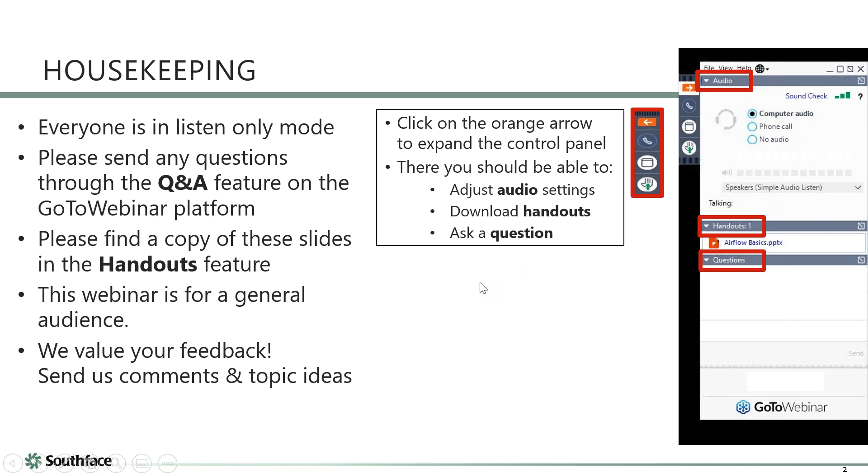So without further ado, you've heard him giggling in the background, we've got Mike Barcik here. Mike, introduce yourself. Hi everybody, thanks for joining us, and shout out to Ali and Joey, thanks for helping put this all together. These have been a lot of fun for us, and I think this one is going to be kind of neat because it's a chance to talk about larger issues of designing high performance homes. It could go in a lot of different directions, you could spend a day or two on any one aspect, but we're just going to say from a higher level, what would you do? So I think that's going to be fun. Joey, anything you want to add? Yeah, and you'll hear us.

I'm seeing quite a few new folks on this webinar. If you haven't been around, we've done about 12 of these, and this one in particular kind of encompasses all of the previous ones, or most of them anyway. So frequently you'll hear us refer to previous webinars, and if you missed them, that's okay, because we have them available for free on our LMS system, and I believe some are posted on YouTube as well. We also did one last on load calculations, that'll get posted along with this one fairly soon.

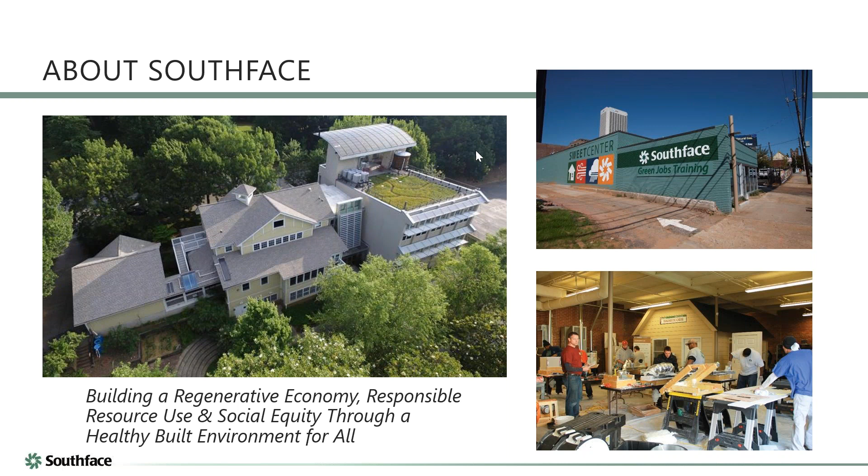And we have a question. We always like to gauge who's here. I think after 10 of these we have a pretty good idea, but if you're not one of the things, we'll go back to that slide in a minute. If you're not represented by any of those answers, you can chat me a message. We kind of wanted to get a good idea, it's almost completely evenly split. I can't see the poll, so you'll have to tell me. I'm gonna give everyone a minute or two. What's the poll question, because I can't even see it?

Oh sorry, how many of these webinars have you attended? So what are the choices? I think we should give a special prize if anybody has attended 10 out of 12. Almost a quarter say they've been here for 10 plus. We'll check our rolls, we'll afford as many trophies, medals, or whatever, gift cards to the growler store or whatever. Sorry about that, I better watch what I'm promising here. But no, that's great. We really do appreciate your feedback and your attendance.

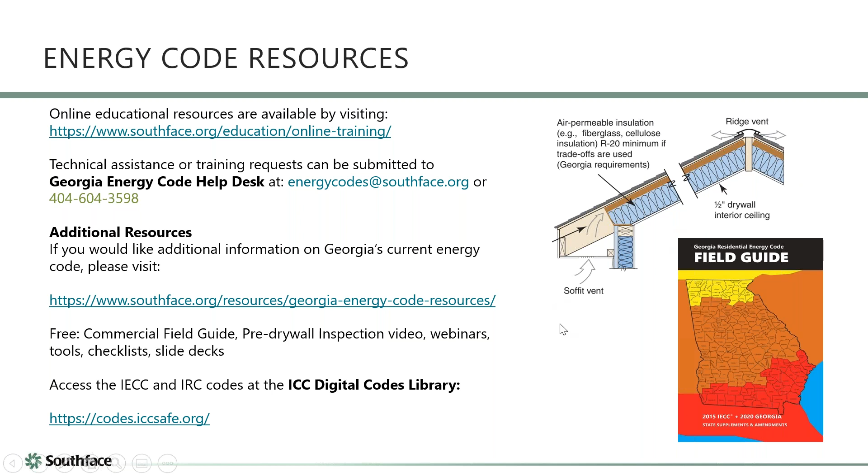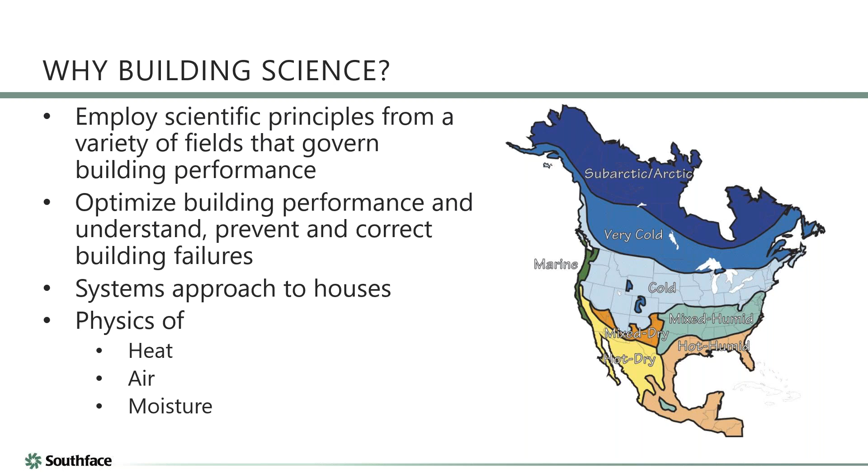We always want to make a pitch that there's a lot of good information on our website, but specifically we recently came out with these field guides helping explain the energy codes with pictures. Obviously a high performance home is going to meet or exceed the energy code, so that goes without saying. I think we've made a pitch for this in most of our trainings about why this stuff is so important and how to apply it to real world situations. Again, it's about the flow of heat, air, and moisture, and houses are systems made up of components, and integrating good design into all this ultimately leads to a high performance place for people to live in.

I think people have probably in the last 6 months had a renewed interest in what it's like to be in their home a lot and what impact that has on them. I do think coming out of this it'll be interesting to see what changes home design. I think you're definitely going to see more focus on use of space, like a home office or homeschooling, probably enhanced pantry or food storage, or toilet paper storage.

I think that's all in the works, but it is an interesting sort of thing that we're learning about how to make our home good.

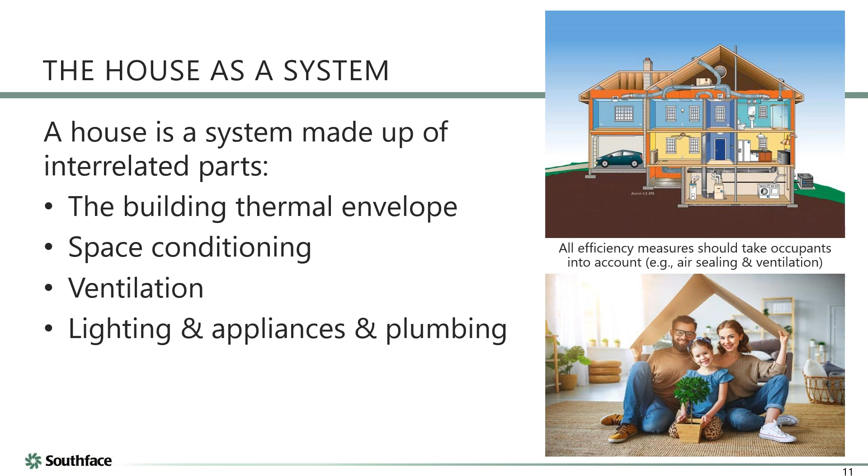So here's what we really want to cover today. My goal is to get mainly through the first bullet and probably get through at least the first 3 bullets. And if we have time, we'll talk about the HERS industry some at the end. I sort of padded some content there.

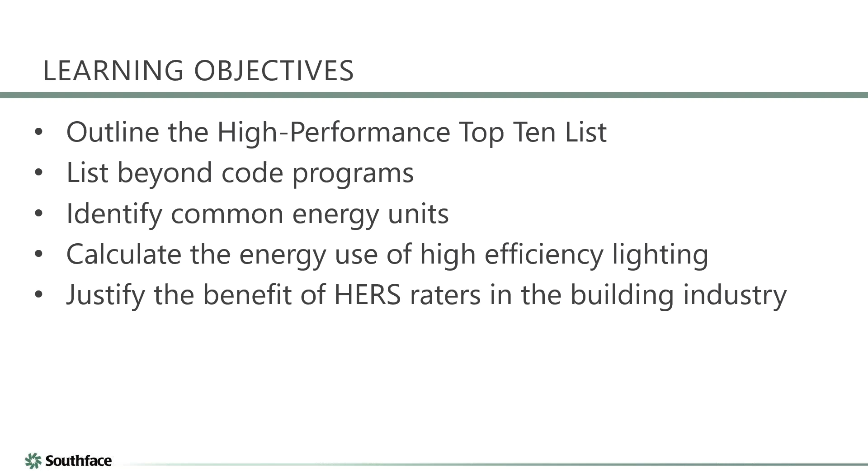I really want to just have a conversation with you, Joey, and see if people have comments or questions. So when I high level approach this, people ask me, I want to design a high performance home, what should I do? And I say, okay, well first of all, we're going to have an understanding of the concepts, the physics, and we're going to let that be our guide.

So heat, air, moisture - we're going to specifically focus on doing a really good shell or enclosure, and that's going to be structurally sound. It's going to be well insulated and airtight. It's going to be durable from a moisture standpoint, and hopefully also constructed out of materials that are environmentally positive in their attributes, or at least try to minimize the negatives.

We don't want to put something in that either is going to make us sick or poison a bunch of people in its manufacture or whatever else. So just trying to go a little deeper is part of our nudge on that topic.

I decided to go ahead and spell out air distribution because I felt like even homes with different mechanical systems, there's always going to be, at the very least, a ventilation system that is ducted. And understanding, usually in this country, we're still building a lot of ducted mechanical systems, and how do we do those right? We've certainly spent some time on these.

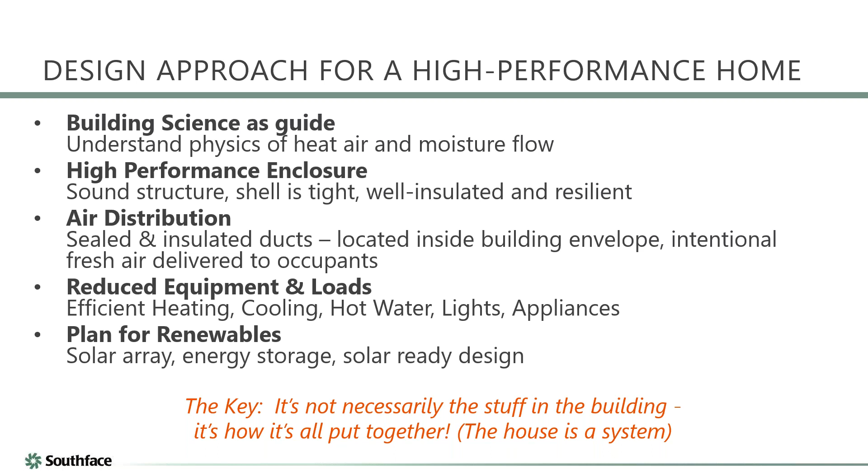I would say try not to get too obsessed with a given technology. It's really not about an individual technology. It's about thinking in a systems mindset and putting things together in a well thought out, integrated manner. So, all right, Joey, I'm off my soapbox.

So I had to do this a couple of years ago with my colleague Burke at the time, and we were presenting to a group of architects, and I thought, well, I must have watched David Letterman or something - let's make a top 10 list of things that you should pay attention to. And so this is what we came up with, and I'm sure there's other things, but ultimately it's a starting point.

So some are more obvious than others, and like you said, Joey, I bet we've done a webinar on just about every one of these, right? Mm-hmm. Maybe not the last couple or so, but most of these. What have we not done it on? I don't know.

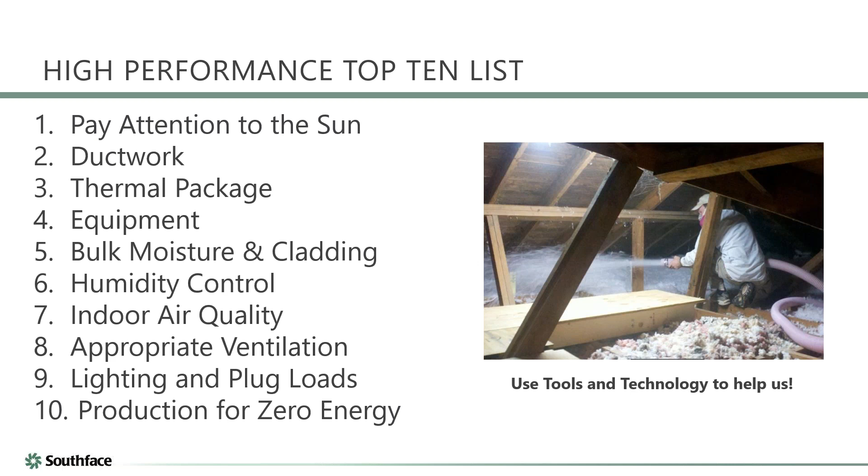So, I'm also going to say there's both design and then there's technology, and we want to use them both intelligently. We don't want to rely on technology to offset a poor design. And likewise, let's take advantage of what technology can offer us to make a good design. So, all right, Joey, number one, pay attention to the sun. What's the rule here?

You generally want glazing on the north and the south and minimize it on the east and the west. That really allows you to take advantage of these overhangs.

This is actually our building at Southface, built in 1996. Even though it's 25 years ago, the sun hasn't changed a whole lot, so we were able to take advantage of long-lasting design decisions. You can actually see the first picture, the one with the shading.

That was taken just a few weeks ago, at the summer solstice on the 21st, at high noon, so the sun is at its peak. You can see our overhangs, which aren't very wide — they don't stick out, they don't look silly, they're just normal overhangs. They're blocking quite a bit of the sun.

And then at the winter solstice, the sun is low and we're actually gaining all that solar energy we need to heat up the building in the winter, which is especially important in winter climates. They really have to capture that sun. We do it more as a convenience, and it takes a little bit off of our heating loads for sure.

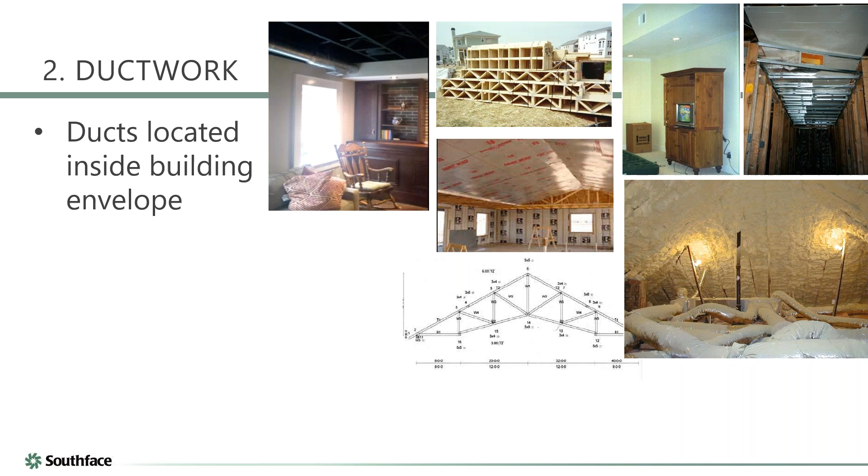It was a lot of fun. We were definitely on our soapbox for quite a bit of that time, but one of the main things we talked about was trying to get the ducts located inside the building envelope.

So these are various techniques to do that. None of them are particularly complicated. A couple are a little expensive, but all of them are done reasonably easily. I'm a big fan of one, just exposed ductwork like we see in the left picture. I think especially now that aesthetic is in, especially in more commercial buildings, but even in some residential.

And then all the way to the far right, using fur down ceilings. That's actually something we used when I first got started in green building. I was in a low income housing program similar to Habitat for Humanity, and we built really high performance homes with fur downs. We used 9-foot studs on the first floor and just put the ducts in that little fur down space. It was definitely very inexpensive and easy to do, and it helped us keep those ducts inside the conditioned space.

That's a great story, and it really helps reinforce how you use design, and the net result is you use a lot less ductwork. You design your registers to throw from the wall out to the middle of the room, and especially now that we have better windows and better insulated and air sealed walls, we don't have to put a register right in front of a window. That's anachronistic, that's just old, that's because windows used to be terrible, but we don't have to do that anymore.

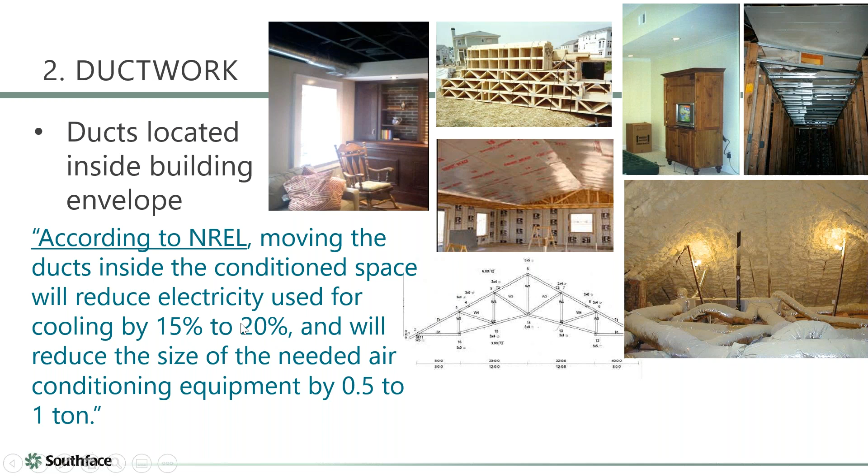So great choices. Of course, with a crawl space or basement foundation, just insulate the walls and condition that space, and now your ducts are inside is a big player. It's a 15 to 20% impact to not put your ducts in the attic, and it allows downsizing your equipment. So big benefits to that.

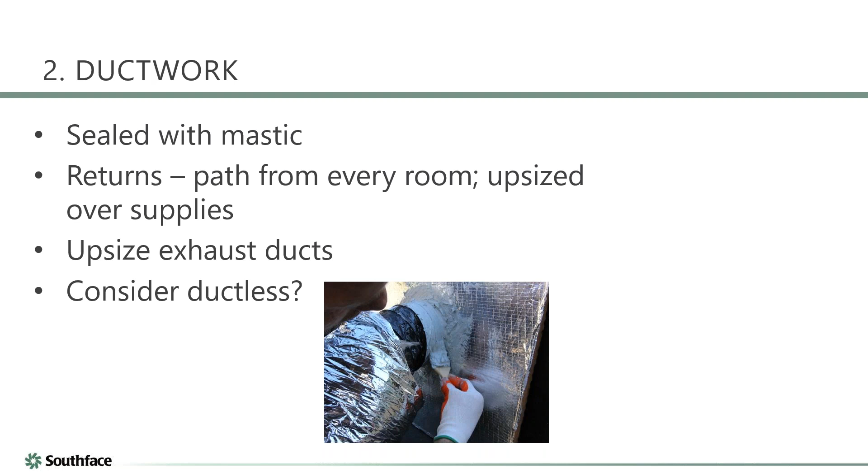Also, other issues with ductwork include sealing ducts carefully with mastic, whether inside or outside. We want the air to get to the rooms. And in terms of returns, we want to make sure there's always a pathway for air to get from the room back to the blower, whether that's a dedicated return, some other return pathway, or a jumper duct.

In terms of returns, I want to go on record saying we have a chronic problem with undersizing returns. You can never have enough, or too many, return pathways. You can never have a return duct pathway that's too big. A larger return pathway makes airflow much easier and allows for potentially better filtration too. So, let's be real, a lot of these problems go away if you look at ductless, and we'll talk more about mini splits in a little bit.

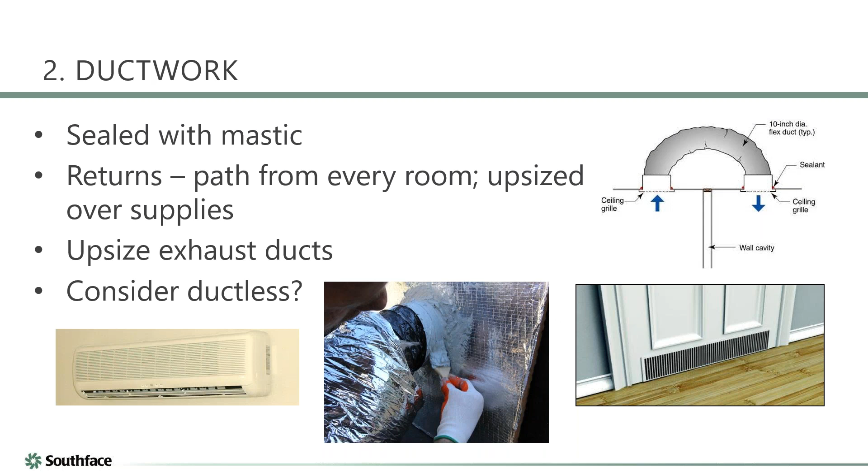From an insulation standpoint, if you look at the prescriptive code today, the newest code out is the 2018 IECC, and if you don't change what that says, it's actually pretty good. I mean your exterior wall - again it depends on your climate zone - but I think you should shoot for at least an R20, and really what we should shoot for is an R20 with a thermal break, so it's even more than that. We'll talk about that in a second.

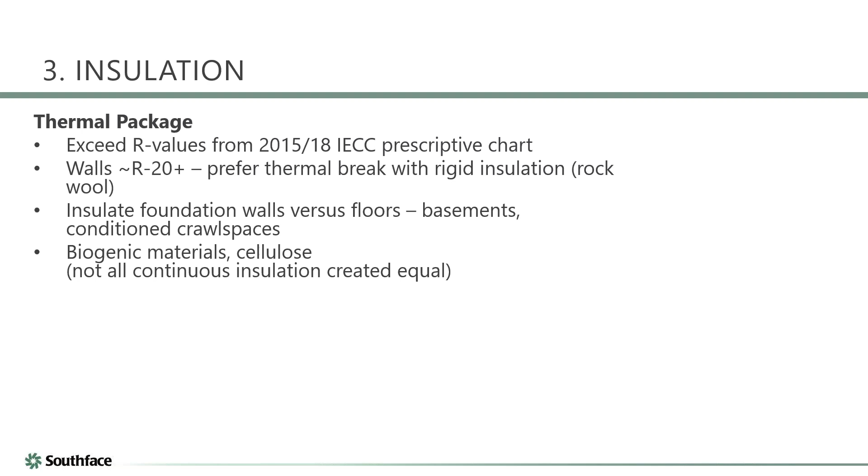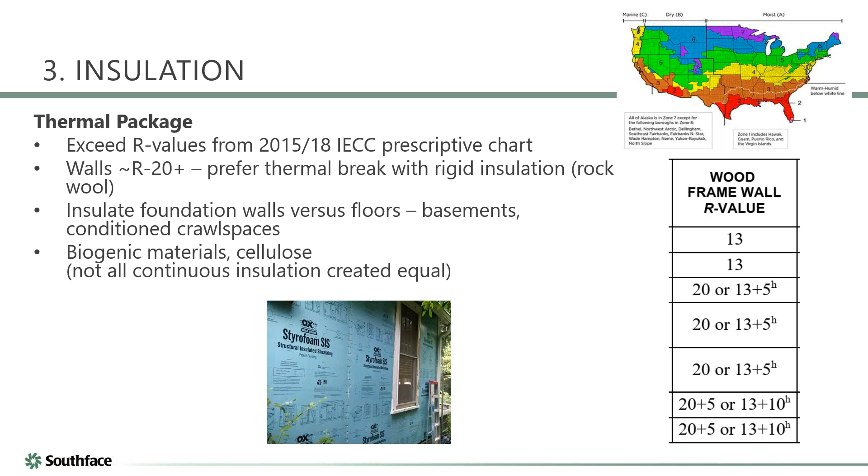And then, like we said, you definitely want to insulate foundation walls with some continuous insulation. There are ways of insulating foundation walls that allow you to, even if you don't finish out that space like a basement, still insulate the walls. Now all your ductwork and mechanicals are inside.

This idea of using materials that can actually sequester carbon is something I think we're going to see more and more of. I'm no expert in that either, but certainly a lot of the new technologies are working on that, which could help in the long term.

I'd say you're being kind of hard on folks. R20 plus a continuous thermal break is a lot. I'd be happy if we just did 13 plus 5. Looking at this chart here, you'll notice the energy code favors this. I'm no engineer, but I'm okay at math - 13 plus 5 is less than 20. So what they're saying is that if you do 13 between the studs and then 5 continuous insulation, such as this styrofoam in the middle, that's about as good as an R20. Actually, it performs a little better - we've done the math in one of those previous webinars.

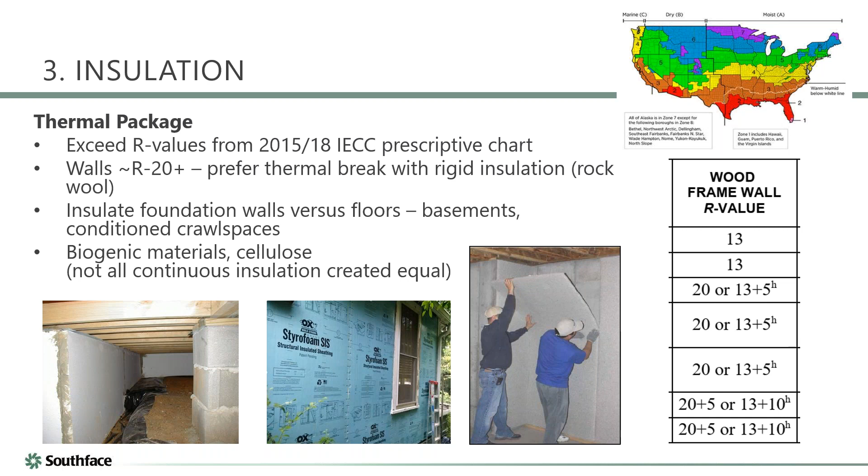Certain types of foam board, sadly the blue and pink actual styrofoams, have more of an environmental impact than polyiso foam or even EPS foams. There are other continuous insulation products too, like rigid rock wool products. You've got to do a little digging on some of this stuff, probably more than we can cover today.

In terms of the actual framing, we're certainly big advocates of trying to put wood where it's going to work for you structurally. You've found this graphic - it shows standard framing versus advanced framing, where you're probably 24 on centers using ladder tees and things like that. There are all kinds of details you can use to essentially not have a building that's any less strong, but that has a lot less conduction pathways through the framing.

This was a house that I think did a nice job, where they framed with a 2x6 plate and 2x4 studs. The inner studs are 24-inch on center, and the outer studs are 24-inch on center, but they're staggered by 12 inches. That allows you to spray insulation inside, and effectively the only thermal bridging happens at the bottom plate and top plates. That's a really cool way of doing it. You'll also notice you can frame in such a way to get insulation back in the corner.

I believe this builder also oversheathed, which is a way you can do things in a number of ways. You can wrap the whole building with wood sheathing, then come back on top of that with continuous insulation sheathing, staggering the seams. There are a lot of variations on that, but that's probably the most common one. So that's a good wall assembly.

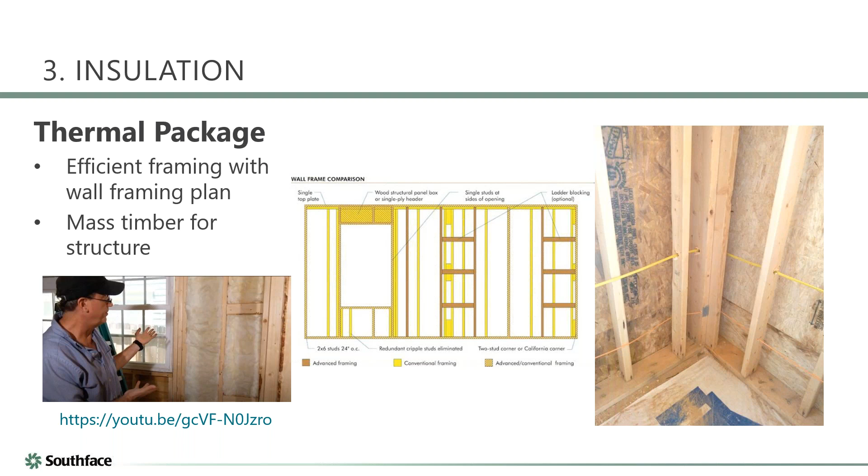There's also products like the Zip system - I think it's called Zip R. It's insulated sheathing - an OSB sheathing with an insulated board pre-attached to it, and a weather barrier on the other side.

So I like that product. In terms of mechanical systems, what are we looking at trying to do?

Here's an interesting one: if you're going to use gas in this day and age, you want to make sure you're using the most efficient equipment out there. For gas space heating, you're looking at a 95% AFUE furnace or better. They do have them up in the 98%, which means literally, you buy 10 units of fuel, you're getting 9.8 units of heat into the space. So it's a condensing technology. It's been around forever. It's a no-brainer. It's very safe. It's obviously very efficient. It's the best way to go.

And for cooling, the big feature you want is variable speed. Variable speed has different meanings, but at a very minimum, you want the blower, the air handler blower, to be variable speed. But more and more, we really want to see a staged compressor as well, or variable speed compressor. The technology helping make this happen is either an ECM motor or an actual inverter-driven compressor motor. I'm not an expert on this technology, but the outcome is that your equipment can modulate itself to match the load on the house.

This is very important because historically we size equipment for the hottest day of the year, and most of the time it's not that hot. So this allows, anytime your equipment can run on low speed, it uses just a fraction of the energy it would on high speed. So very important.

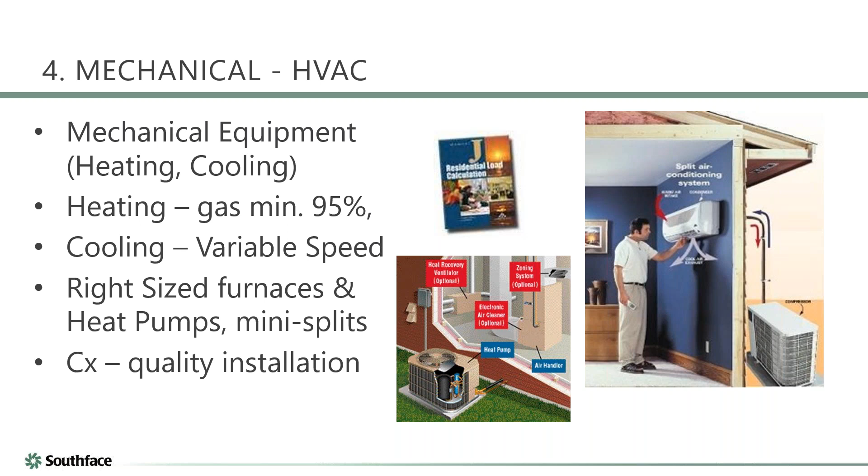So for hot water, maybe in the future, Joey, we'll do an entire webinar on this topic. But this is one where we now have these really great choices for both gas and electric. So if you're going to go with gas, we want something that's very safe, and that means we need to up the efficiency. Tankless is very popular today as well. For new construction, I think you can justify gas tankless. Let me be clear, not electric tankless, gas tankless.

For homes that are all electric, an electric heat pump water heater is an incredible no-brainer. It is significantly more efficient than electric resistance tank, to the point where it's probably right on par with the cost of hot water with gas, maybe only slightly more. So it's definitely almost 2.5, 3 times the efficiency of an electric resistance tank. Heat pump water heaters, really good idea.

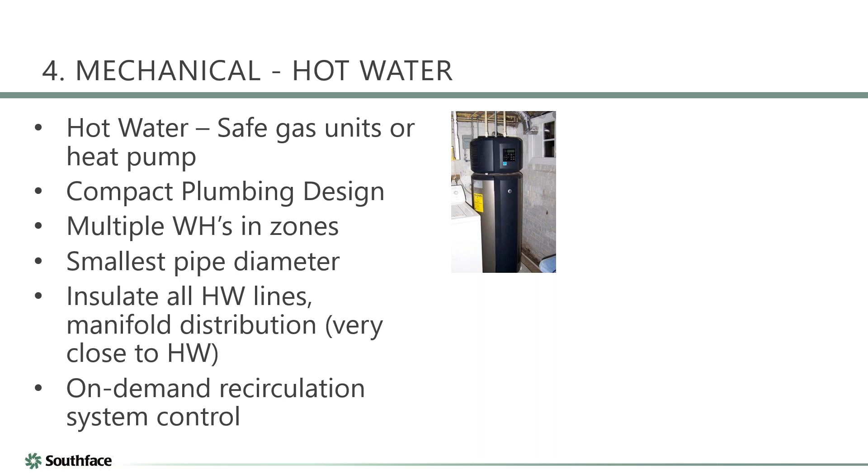There's a lot to be said about where you put them. They can be noisy, and they need a certain amount of space. But a great place, where's a good place for a heat pump water heater? The basement. A basement is an excellent place for one, because one of the things you get is free dehumidification of the air around it. So keeping a basement dry, like this picture, is a good idea.

Pipe insulation, pretty much a no-brainer, very low cost, very good benefit to that. Insulate any bit of hot water piping.

Compact plumbing design: try to cluster your hot water using fixtures relatively close to each other, and run your plumbing lines as small a diameter pipe as you can. You really want to minimize the volume of water between the thing that makes it and the thing that uses it. So the answer is short, straight lines, small diameter, and cluster the plumbing together.

Also, in bigger houses there's nothing wrong with using more than one water heater. Here's my thing though, don't put two water heaters side by side down in the basement of a big house. Put one on the east wing and one on the west wing, that kind of thing. Use good judgment on this, and appreciate that plumbers are not tuned into this. They understand leaks, but they don't understand distribution issues.

It's all about really trying to minimize the volume of water, and that's why we have things like manifold systems. And Joey, tell us about recirculating systems.

Recirculating systems, basically, if you have a water heater that's far away from the fixture you use, and it takes a long time for that water to get hot at the tap, a recirculating system will flush that cold, or lukewarm, formerly hot water that turns cold after a certain time, throughout the system, so you have basically instant hot water. This can really cut down on water usage, because typically you run that hot water for a minute or two before it actually warms up, so that can be gallons of water wasted every time you turn on the hot water, which is unfortunate.

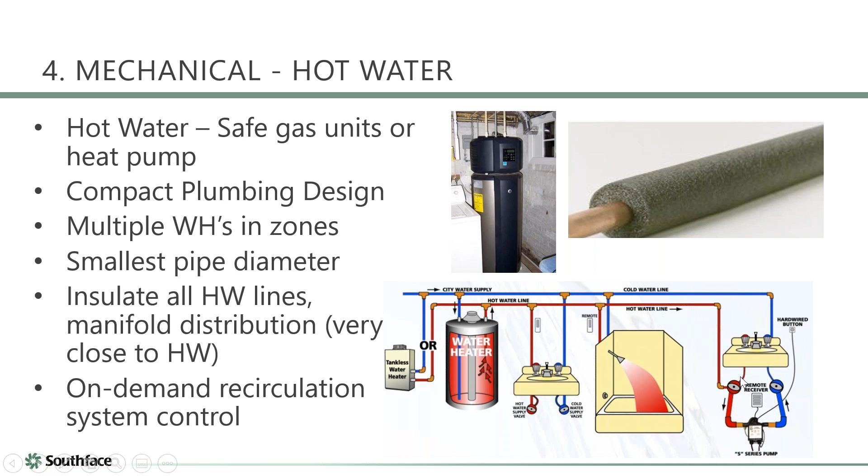In terms of moisture issues, we spent a whole webinar on this topic, which is shedding liquid water intelligently. There's all kinds of stuff about foundation drainage, but from a cladding standpoint, I always want to have a well-defined weather barrier, water resistant barrier, whatever you want to call it, WRB. That can be house wrap, felt, or a lot of products. It could be the skin of foam sheathing if you seal the seams, it could be the zip system.

But then I'd like to have some sort of vented space behind the cladding, between the cladding and the water barrier. Here are examples with furring strips or similar. And of course, integrate your flashing details. I love that this picture doesn't have the big red slash through it. So that means it must be good, right?

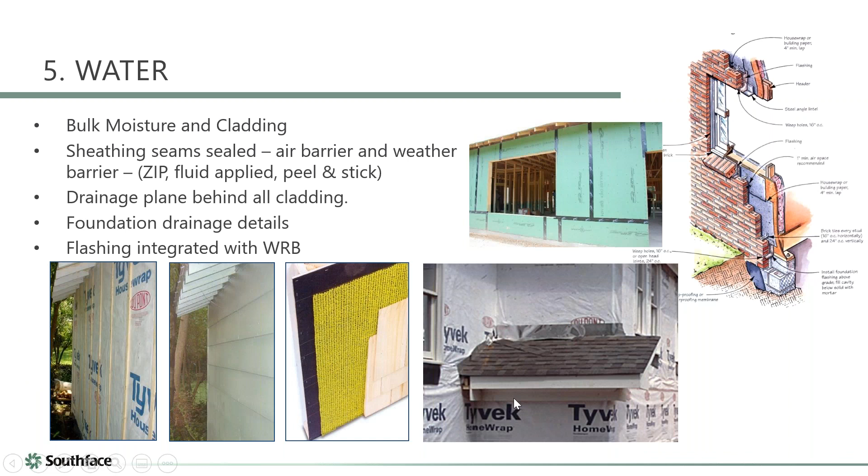Yeah, it looks great. And particularly with what we call low load homes, as we insulate better and make homes more airtight with good windows, we've cut down a lot on the sensible heat gained into the home, but we still often have to deal with moisture. So obviously we want to fix bulk moisture issues and make sure we do well on the outside, but we've got to acknowledge we're in a humid climate. A dedicated dehumidifier, or at the very least variable speed equipment that can run in a dehumidification mode, I think is absolutely appropriate.

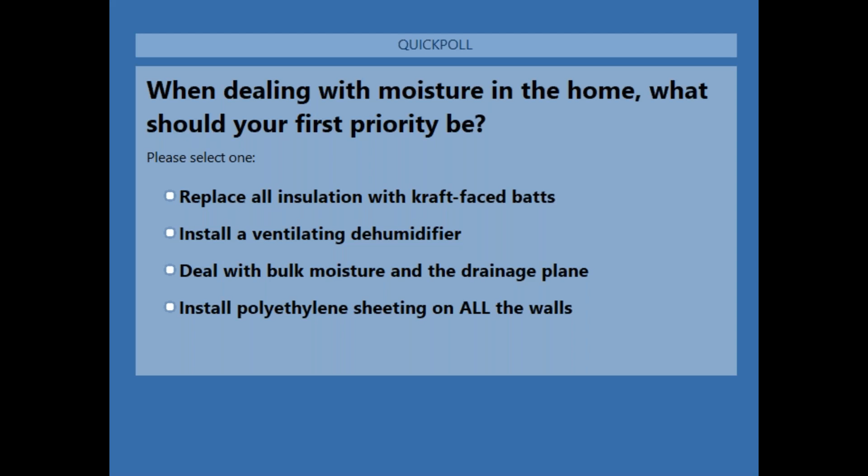Thankfully, no one bid on the kraft-faced batts option. We really do not have a need for vapor barriers or vapor retarders in our walls and ceilings. We do want plastic under the slab on the floor of a crawl space, but we don't need it in our walls and ceilings. So I'm going to go with bulk moisture.

Let's see what the poll says - the majority did. About 70% went with the drainage plane. A few went with installing a ventilating dehumidifier, which is a great strategy once you've dealt with that drainage plane. If you don't deal with the drainage plane, what you're going to do is just take in all that bulk moisture and then run that dehumidifier 10 times longer than it really should be running.

I've seen this many times - people will run dehumidifiers in a ventilated crawl space. That's generally not a great idea.

I got a call last week from a HERS student, a HERS Rater guy in North Carolina, and he was telling me about this home that had 70% humidity on the top floor, and this was a fairly new home, probably 3 years old. Of course they're running the air conditioner down in the 70s and high 60s, and the reason they're running the air conditioner that low is to try to dry it out. We talked about it - I think it was a bulk moisture issue and possibly infiltration too.

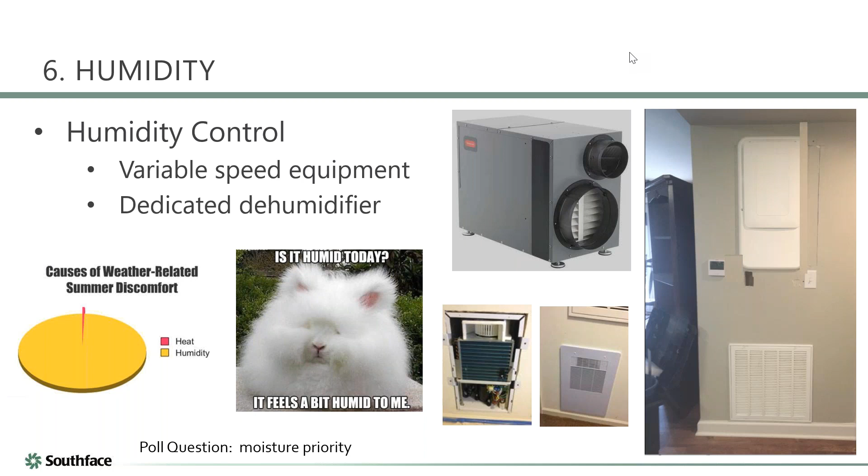Moving on - IAQ. We did two webinars about ventilation and IAQ, but the big picture is to try to select materials, particularly finishes, that are intelligent. Salvage materials have a lot of environmental benefit to them. Brand new materials that have recycled content usually are also good for the environment. And then there are certain chemicals that you really don't want, which are sadly more prevalent than they should be - they're called red list chemicals.

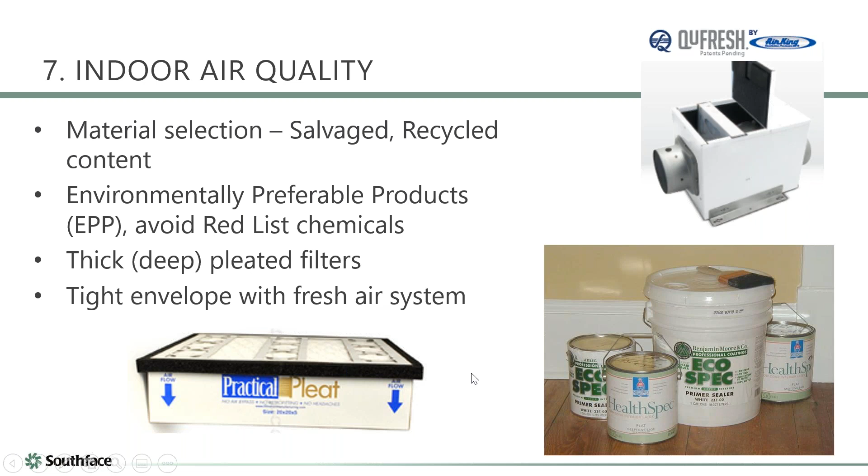So absolutely avoid anything with those red list chemicals. Pick low or no VOC finishes and stuff like that. And of course, we had a whole talk about filters - I really like a thicker, deeper pleated filter that allows you to have a lot of surface area. You can do a lot to help control bad air and moisture with a tight envelope, but then you need to provide fresh air. We talked about a lot of different strategies on how to do that.

Here's some more pictures. There's theoretically three ways to do air changes in a home: suck it out, push it in, or do both at the same time. In humid climates, we would like to either be balanced or positive pressure. So these are all examples of balanced or positive pressure. This is balanced - it's a ventilating dehumidifier, arguably the best technology for a home, certainly a good Band-Aid for a home with a moisture problem.

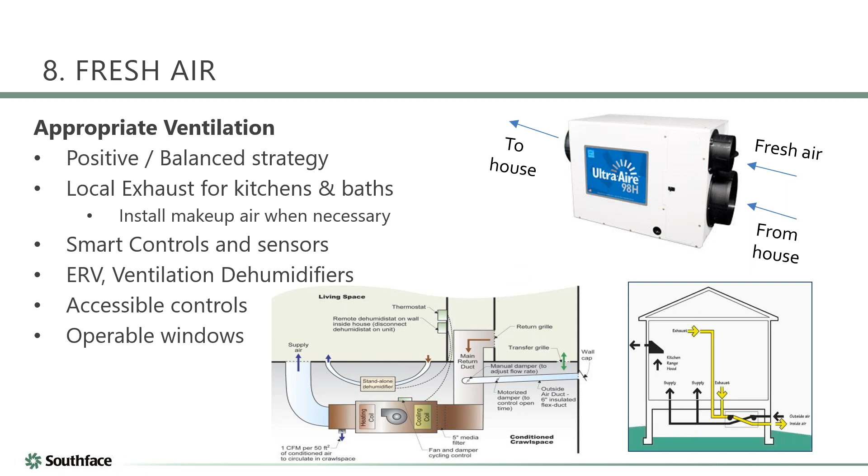Balanced would be like an ERV. This would also be positive pressure, sometimes called central fan integrated supply. The idea is we're also going to pull air at the kitchen and bath out - I call that spot ventilation or local ventilation. We've also talked about good smart controls, all kinds of stuff to make sure we're getting fresh air in case there was a pandemic - I'm sorry, did I say that - in case we needed fresh air. We want fresh air in all buildings, tight and even leaky.

Plug loads - I think it goes without saying, you should not be walking in your house and see a single light bulb that's not LED. If they're compact fluorescents, we can debate whether or not you should replace it, but anything that's not that, you need to change it today. Don't wait for it to burn out.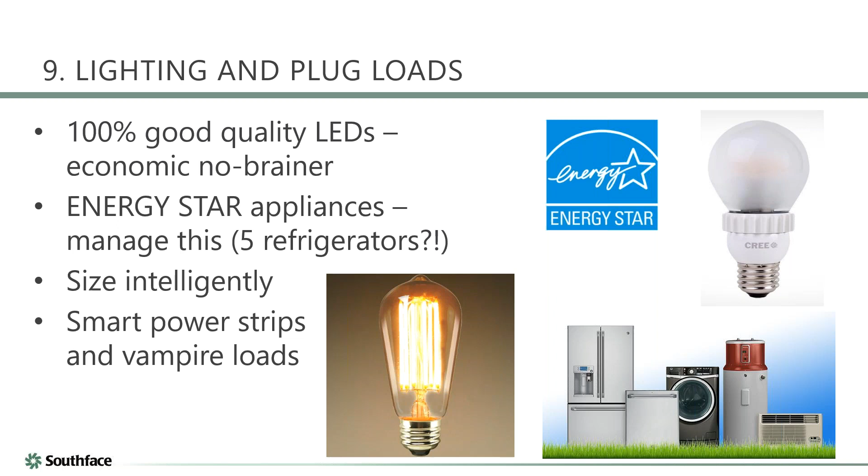With appliances, the short answer is pick Energy Star, and then really try to pick a little bit intelligently on that too. Just because it's Energy Star, if it's a ginormous walk-in freezer that you don't really need, that's an unnecessary load. So try to make good choices about appliances.

2x4 rafters, 24-inch on center, and they said yep, no problem. So I did add some structure under it. I didn't have to, but I did add some structure, put some kickers under it.

You also want to have a piece of conduit or some means to get from your solar panels to your electric meter. And in this day and age, it probably behooves us to think about where we might want to put storage, because down the road you might want to add batteries. So giving some consideration to where you're going to do all this makes it solar ready.

You don't have to actually spend any money on actual PV, although let me say, this is a very good time to do PV. If anybody's listening and you live in DeKalb County, you should sign up for Solarize 2.0 because it goes away at the end of the month. It's an unbelievable deal, Joey - pre-tax credit right now they're already at $2.50 a watt, and that's before the 26% tax credit. So if you're going to do solar, do it this year, because the tax credit is going to go down. Very much look into it.

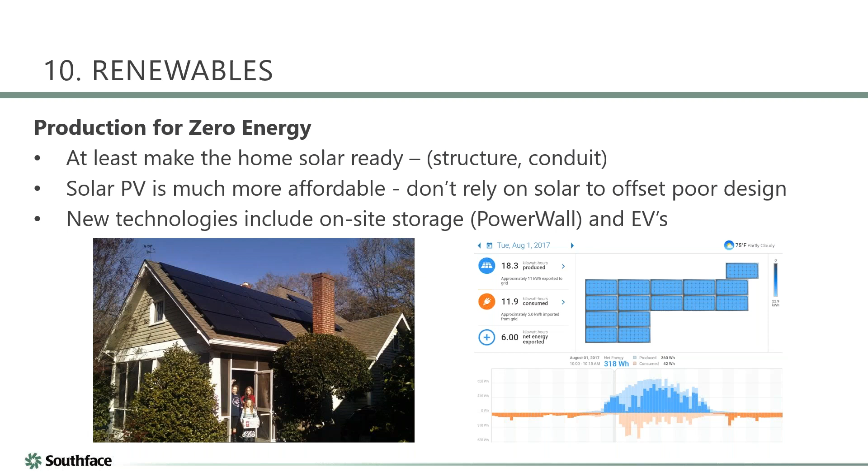Joey, do you want to pull up a poll real quick? Yeah, kind of as we wrap up this top 10, I wanted to make sure everyone's still paying attention. So what should your first priority be when trying to save energy? Should you get a new high efficiency HVAC system? Should you install solar panels? Should you address the building thermal envelope? Or should you install new windows and doors?

So it looks like quite a few - I'm gonna just stop it right now because I like this. We are 100% addressed the building thermal envelope. So no one bit on the solar panels. That's kind of what I was getting at there.

And I wanted to give Mike a little credit - if you haven't joined the webinars, it's been kind of a journey on how much Mike has done on his 100-year-old home. It still has more to do.

Mike, at what point did you look at the solar panels? Was this early or late in the process? Well, I wanted to be a real early adopter, so I wanted to do this about 8 to 10 years ago.

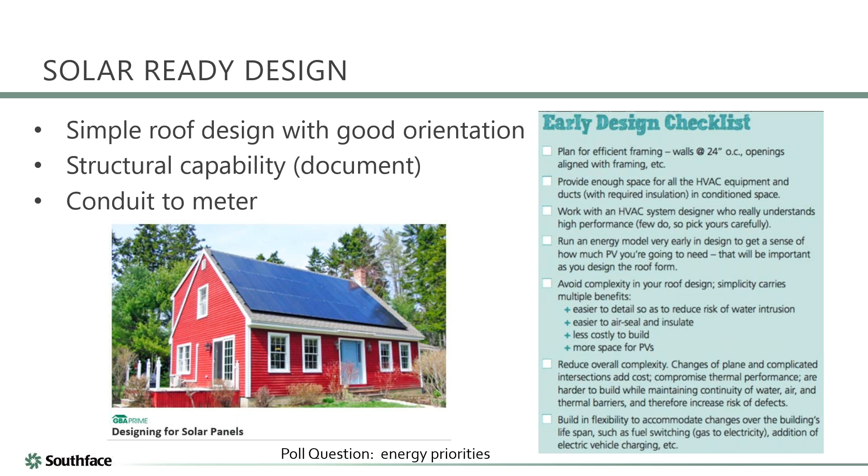Okay, can we drive on? Yep. I want to make a pitch for a great place to get more information. I think Joey and I are both pretty avid readers of greenbuildingadvisor.com. They have articles anybody can read, and they have the Prime membership, which I think is totally worth it.

But these 3 articles, from last month I think, July 22nd - one was about designing for solar, one was about your insulation's footprint if you will, and one was about layout in terms of floor plan, which are just great design articles. So definitely check them out. And I want to end on this, and I say end, we have some other stuff, but I love this quote.

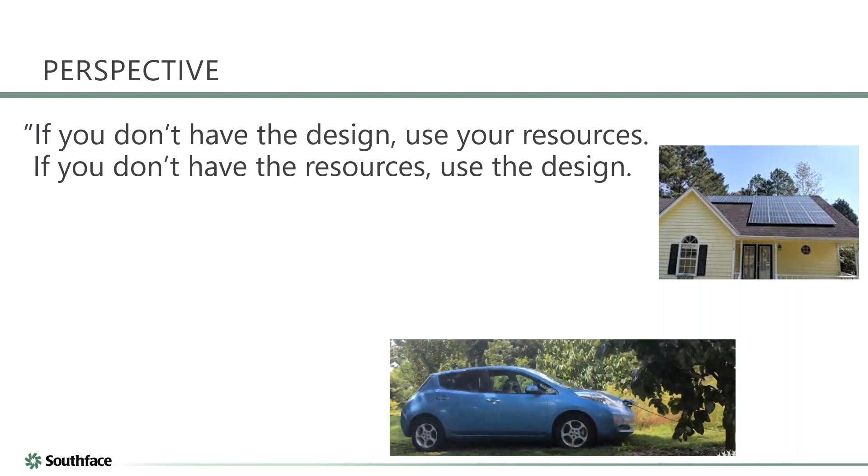This is from another friend of mine who was also on LEED faculty with me years ago. He said, if you don't have the design, use the resources. So sometimes you're stuck with what you get on an existing building. If you don't have the resources, well, let's have a really good, efficient design. I'm not saying that is, but if you don't have either one, you're just not committed. So pony up one way or the other. Either put the time into it or put some money into it, but we can make buildings much more efficient and much more environmentally less impactful than we have been.

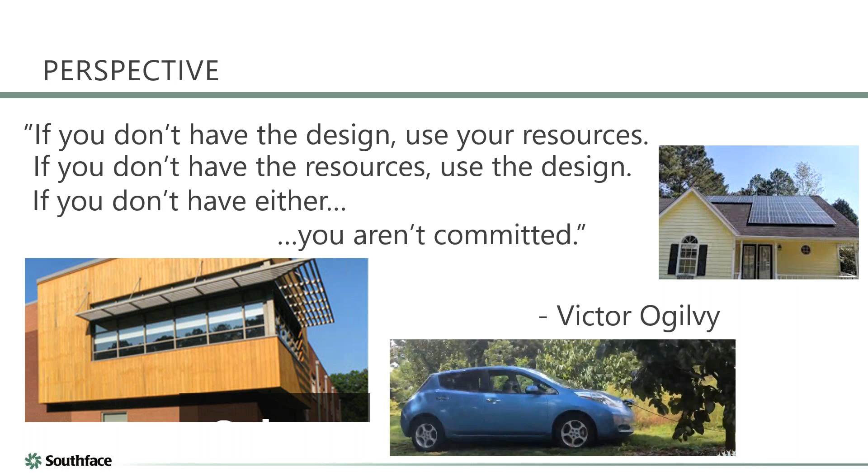So I thought that was a great quote.

And then in terms of technology, how to get there, we have great tools. We have energy modeling that can help us figure out our target energy use intensity, which is a fancy way of saying how many thousand BTUs per square foot per year is this home using. One great website is the Architecture 2030 Challenge, which I looked at a few years ago, and it gave the site EUI. Source has to do with what fuels are making your electricity and things like that, so I don't have a lot of control over that. I do have control over my site EUI, which is how much energy my house is using. So a house in the South, single family detached, is about 42 kBTU per square foot per year.

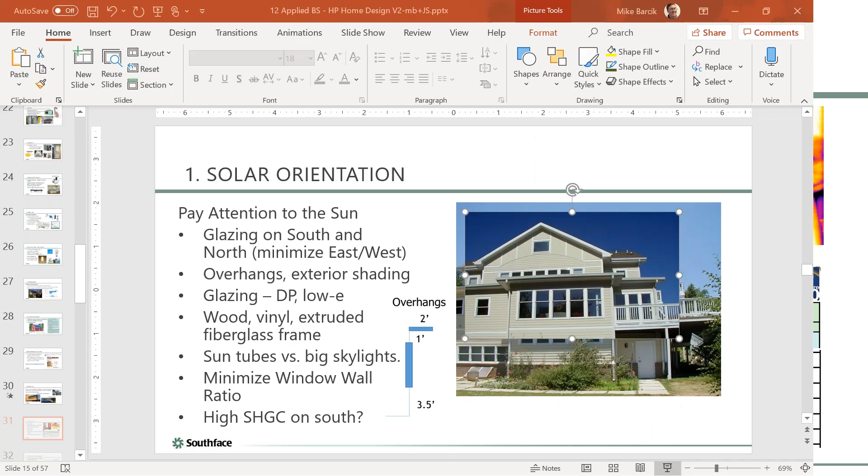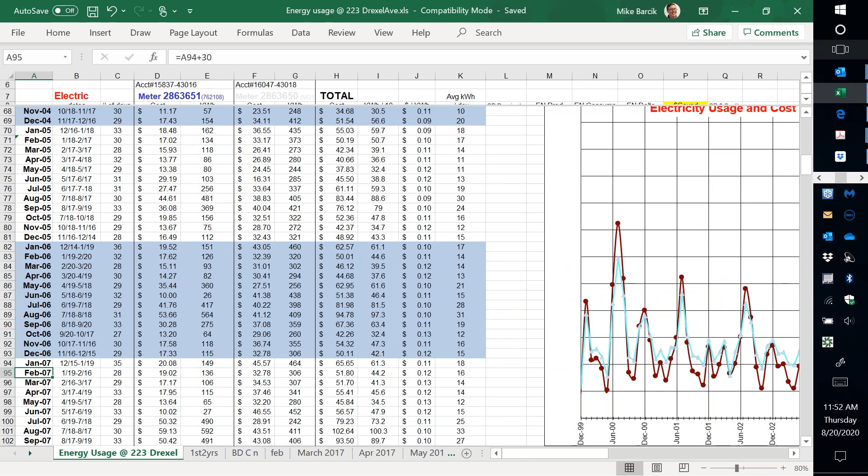And my goal was to hit half of that. Let's see what happens. I kind of religiously track my utility bills because I'm that guy, just so you know. I can look at my energy bills for about 20 years, and I can see what I've spent, how I'm doing, and what happened when solar came in.

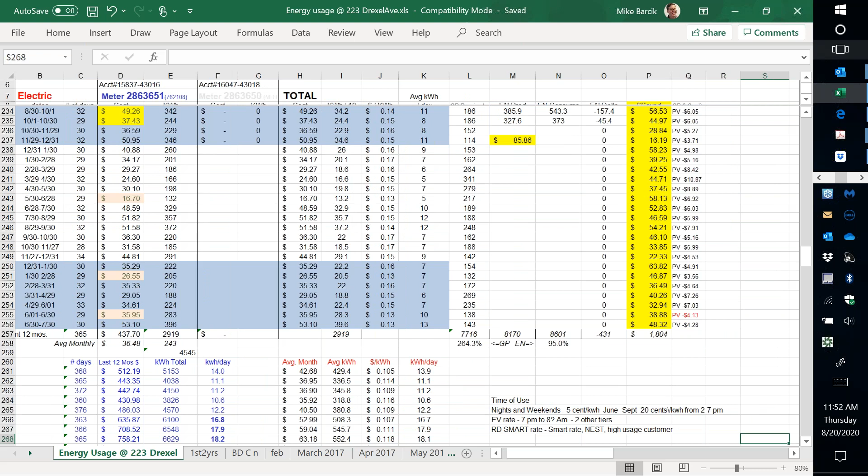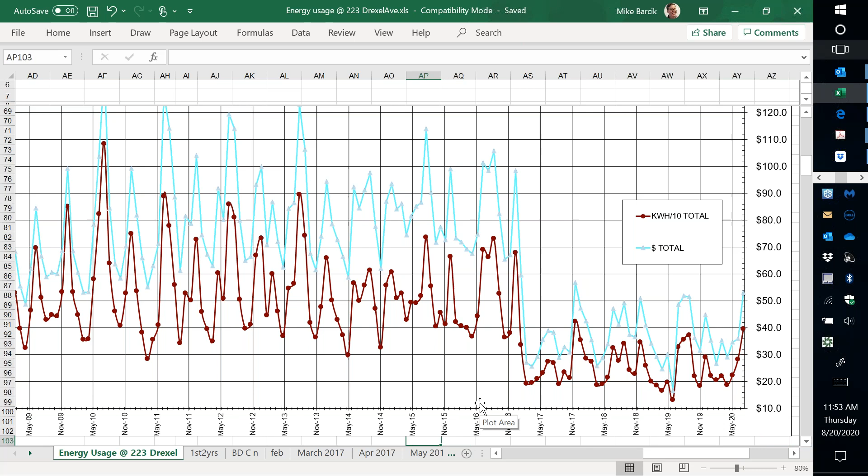If we had more time, I'd show you. This is our electricity usage, and it did a pretty typical peak in the summer, a little spike in the winter, that kind of thing, until we had kids, and then it went way up. The blue is cost, the dark color is consumption, and you can see this is when utility rates went up by over 50% in about a five-year period. And then you can also see when I installed solar. You can see the last three years what happened to electricity consumption. We managed to offset about 93% of what my home is actually using from the meter.

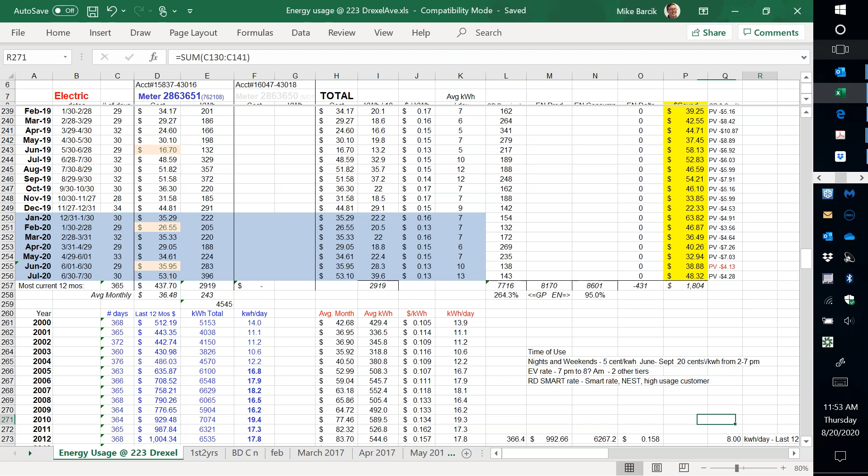So with gas, I don't know if I want to show you this similar kind of thing. Maybe I can show it a different graph way here. It would help if I knew where I was going. Nope, that's not it. I swear I got it.

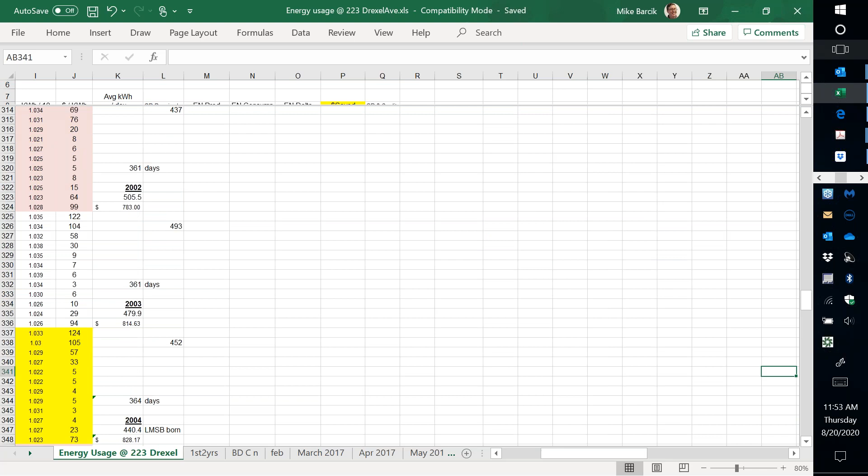Oh yeah, this is gas consumption, and you can see, the first full winter we were in our house was December 2000 to 2001. In January 2001, we used about 573 therms of gas, that's over the 7 coldest months. And here it is going on into the future, and you can see with efficiency and improvements, we're getting it to go down. We got it to drop below 200, and that's about where it's been hanging out the last 8, 9, 10 years or so. We've added some appliances and stuff like that, but you can see that our gas is about a third of what it was the first year.

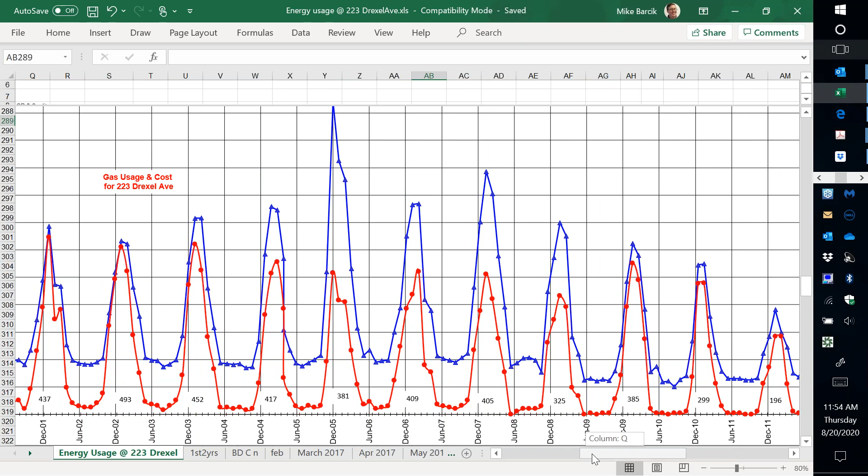So where I'm going with this, and then I promise I'll stop looking at graphs to make everyone happy. I plotted this, tracking it, and it's pretty easy to take your kilowatt hours annual for the year. Once we had kids, we were typically using about 6,000 a year, maybe a little more, 7,000 in 2010, but I'd say around 6,000 kilowatt hours a year. And then also a certain number of therms per year, and you can convert all those into BTUs. Then you take the BTUs divided by the square footage of our house, and you can see our EUI. Our first year EUI was about a 50, then we got down to about 40, kept getting better, down into the 30s, and now we're in the low 20s. So that was my goal, to hit my halfway target.

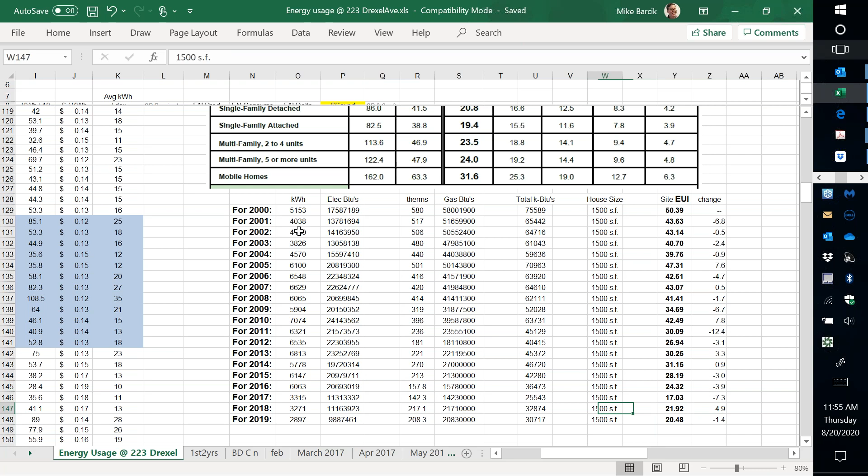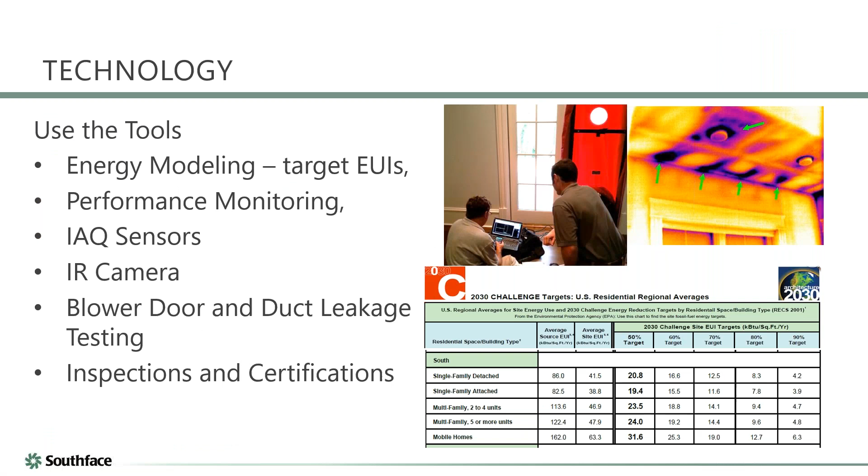I haven't given up, but that was a goal. So I think having data like this is valuable because it helps you push for a goal, and you can model and try different things. Also, when you participate in a Beyond Code program, there's a lot to be said for that.

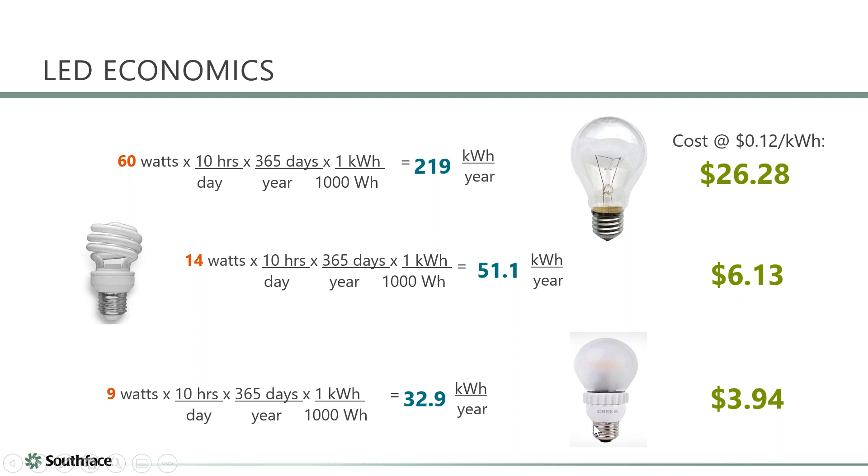So Joey, that's probably the meat and potatoes of what we wanted to talk about. With LED lighting, there's an incandescent light bulb at 219 kilowatt hours a year. Here's one that's compact fluorescent, 51. Here's an LED, 33. And the economics of each: a 60-watt bulb equivalent is going to cost you $26 a year or $4 a year. So it's really the cost of the bulb that's insignificant compared to the cost of the energy it uses. Is that okay? Did I go too fast, or do you want to add anything?

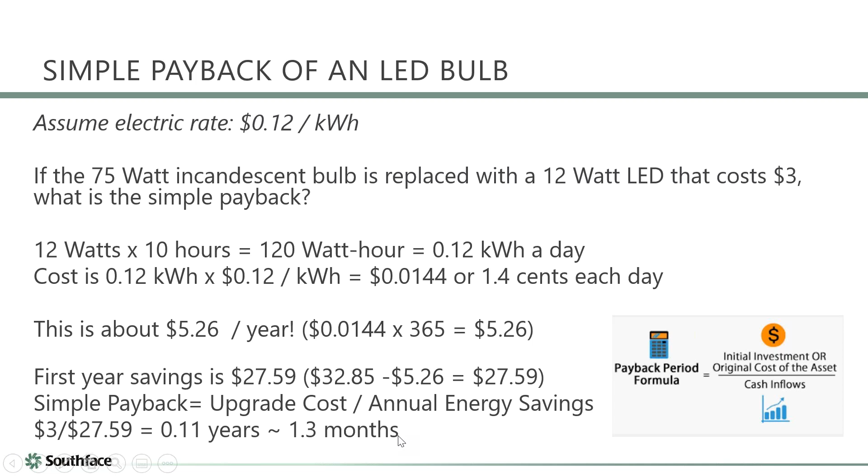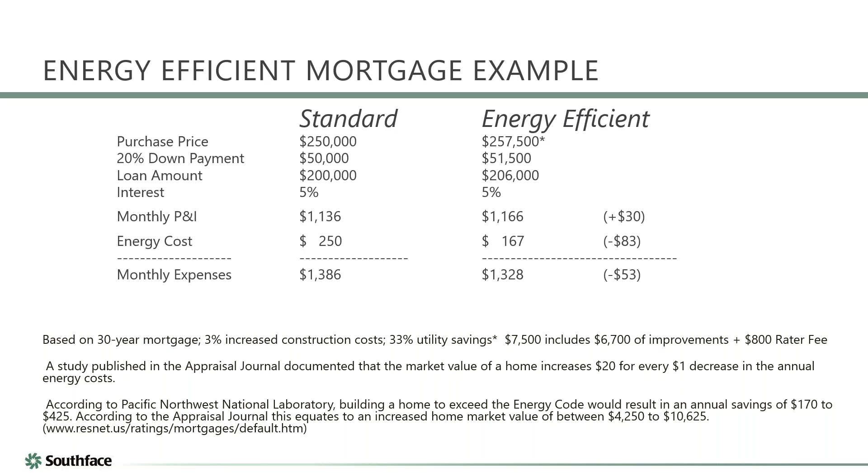I think that's enough said. Can we jump to the end? The rest of this is kind of talking about the HERS index and all that good stuff. HERS raters are folks that can help you with this kind of stuff. So that got us to the finish line.

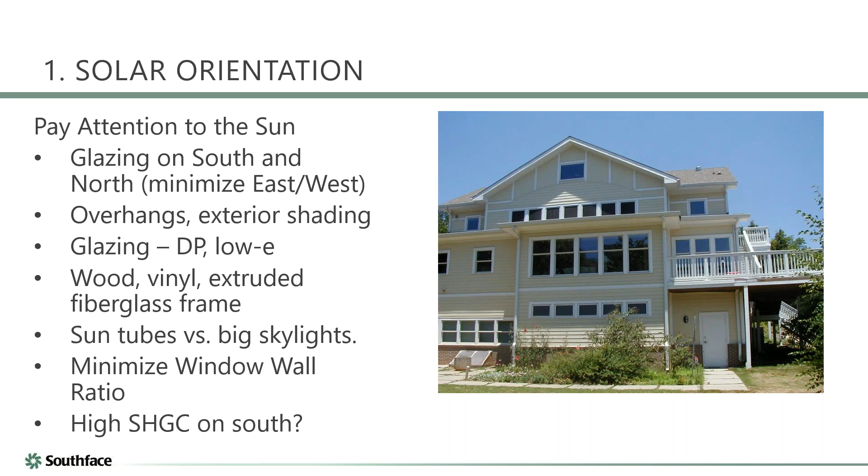And again, that's where going to some of the beyond code programs might really be appropriate. I don't know where that slide would be, I'm just guessing. But I do think those beyond code programs can help you with some of those site issues too, for sure.

If it wasn't clear, I was stalling a little bit. We didn't get a lot of questions in, so I'll give you guys just one more minute before we shut this down, time to go eat lunch. You know Mike has to get to lunch—never missed a meal.